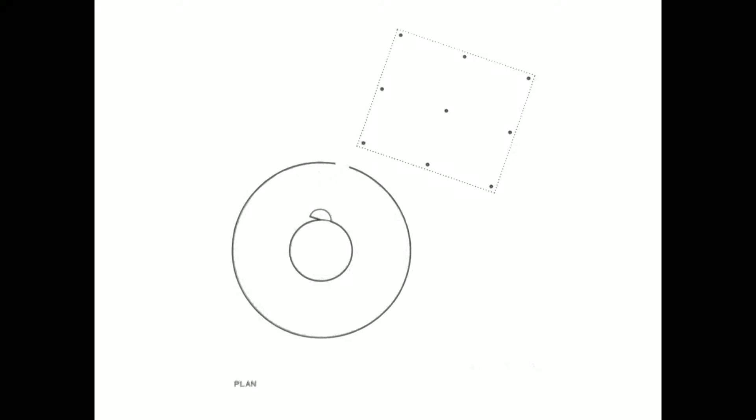It's about building simply: fixing branches in the sand, bending them to create an arch, surrounding them with straw panels with a porosity that allows air to go through, covering it with another kind of straw that will avoid water coming in during the rain season. So it's a straw hut with a little door to go in, a fence around, and in front, outside, branches fixed in the sand, covered by a roof, itself covered by straw. It was the first house that we designed at the limit of the Sahara in Niger before we started our office in Bordeaux.

It's about building with climate, not fighting against it. Taking references from professional greenhouses, this very simple ventilation system with large openings, letting the warm air go out from above and enter from the ground, using transparency to create climatic conditions for different kinds of flowers or vegetables, and transferring and adapting that to habitation, to housing, to inhabiting, to create this extra space and this free space.

It becomes greenhouses in front of houses. It becomes winter gardens. It becomes these relations between inside and outside that are so important, making every inhabitant feel like they live in a villa, turning around the different rooms.

It means enveloping the flat with a kind of double skin, a skin that is never the same, not the same in winter or summer, not the same at night or in the day, like clothes on your shoulders. If it is winter, you add one or two layers more, or a big coat, and when it is warmer, you take them off.

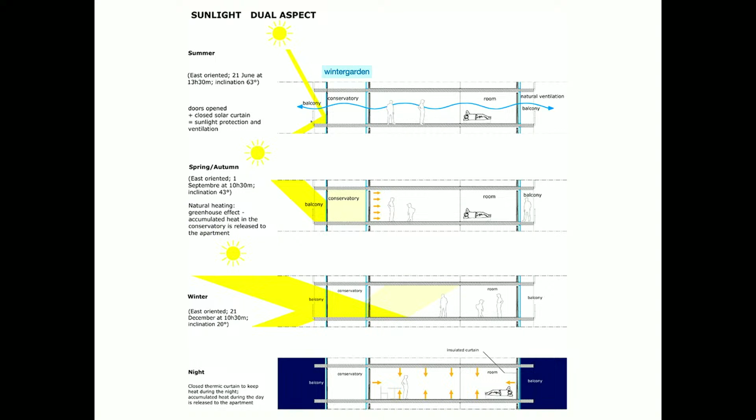So the flat and the house should work a bit like that, using the ventilation system from one facade to another, using this passive bioclimatic system of warming the buffer zone of the winter garden in order to give this warmth to the rest of the apartment and save some energy, using the rays of the sun according to their orientation, which is different in winter or summer.

Build double. It was, after coming back to Africa, the first house for Mr. and Madame Latapi. The budget was really minimum, just enough to have 60 square meters for 60,000 euros in France. Discussing with them, we went to the project to create 3 times more space for the same budget: 180 square meters for the budget that allows to build a standard house of 60 square meters.

The greenhouse on the east is 60 square meters large. It is not heated because it is heated directly by the sun, oriented east to take the first rays. We imagined this space could be for tropical plants, but immediately it was used differently by the inhabitants, placing all their furniture, their sofa, tables. We thought it might be used perhaps 50% of the time because of climatic conditions, since it was not heated, but it is the space that is most inhabited. So the space that does not answer to the regulations, the norms, the temperature limits, is finally the most inhabited space.

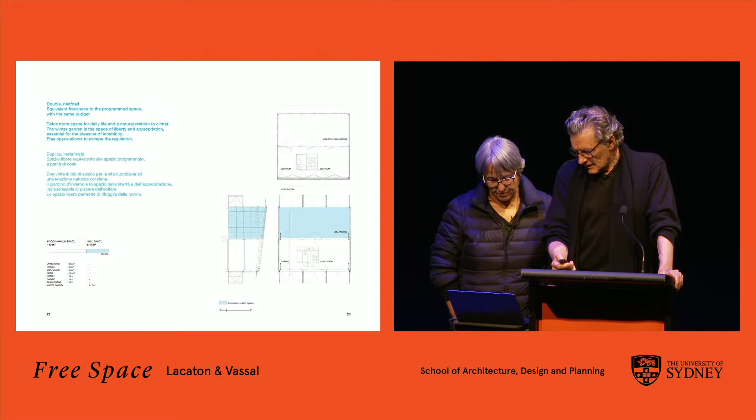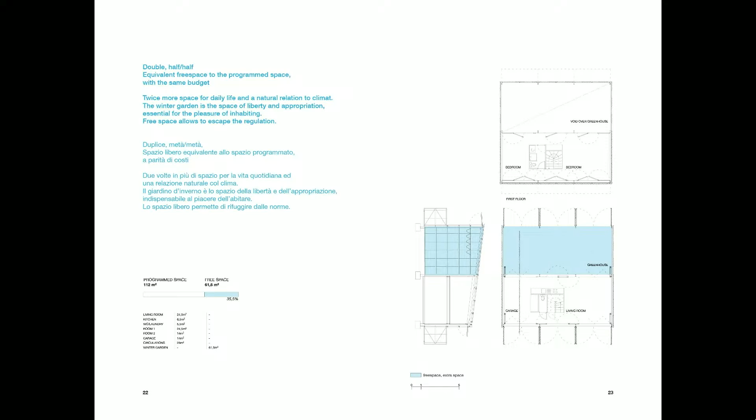In the drawings, you will see we use the color blue to show this extra space, this free space. In the case of Latapi House, it was this big greenhouse, 60 square meters, that doubled the space, which is so important in the life of the inhabitants.

So generosity of space is for us an essential condition for living well. In every project, it's a preliminary condition; we don't imagine doing it in a different way. What we can do in a house, as we showed before, we aim to do in any condition, especially in collective social housing. But it's also different situations.

Housing, collective housing, social housing are really determined by a lot of constraints, a lot of norms. Something like 4,000 norms are applied to one apartment when you have to build it. It's also very standard surfaces, connected with the subsidies, either given by the government, by the city, or if it's private development, by the developer. So all this is constrained within very, very strict limits.

But in this case, in Mulhouse, we were asked by a social housing company to work on social collective housing. The director of this company was very open, because he thought the housing was too constrained, and he wanted to experiment with whether it's possible to do something else, and under what conditions. So we were 5 architects working on this project, each with his own background, asked to explore this situation with the only condition that we should respect the budget, because it was corresponding to the public subsidies.

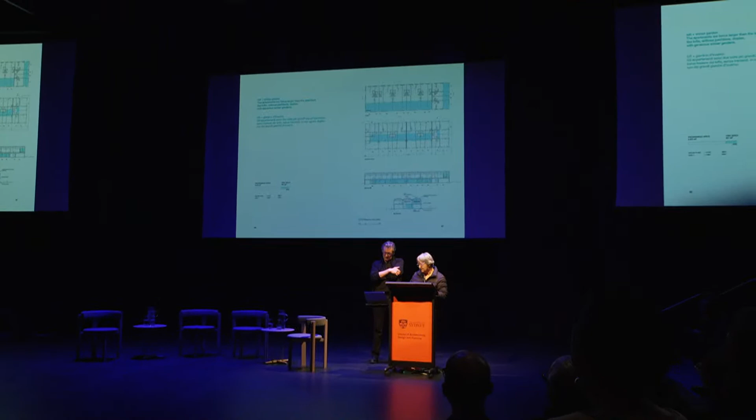So we started this project with the same idea of largely increasing the space, because for us, 2 bedrooms of 60 square meters, basically a kind of standard, 65 square meters, seems too small to have a nice life, to be quiet in the family, to have freedom of being together but also having the possibility to be separated.

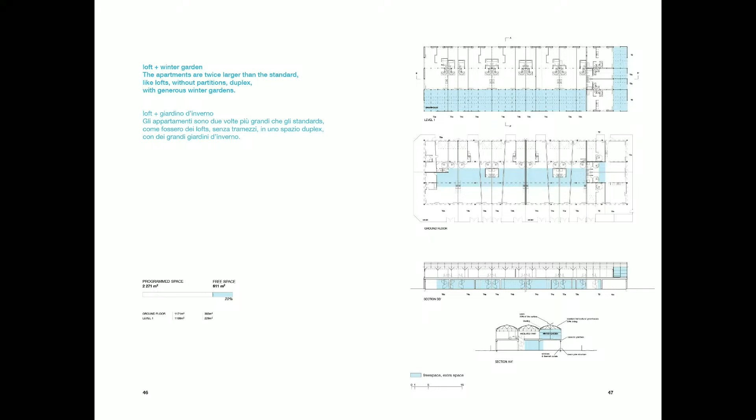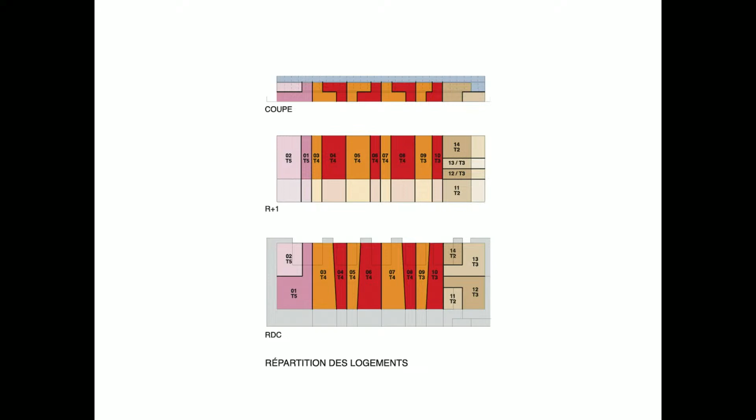So here we wanted to apply the same idea as in the Latapi house, doubling the space, making as much extra space as program space. That was a discussion with the owner, and he agreed we could do that. This is the plan of the project. It starts with the idea of a big loft with winter gardens, which we then divided into 14 apartments, each with a space on the ground floor and a space on the first floor, to benefit from the same conditions, the same qualities. So the 5 architects had the same kind of plot, and this is our proposal.

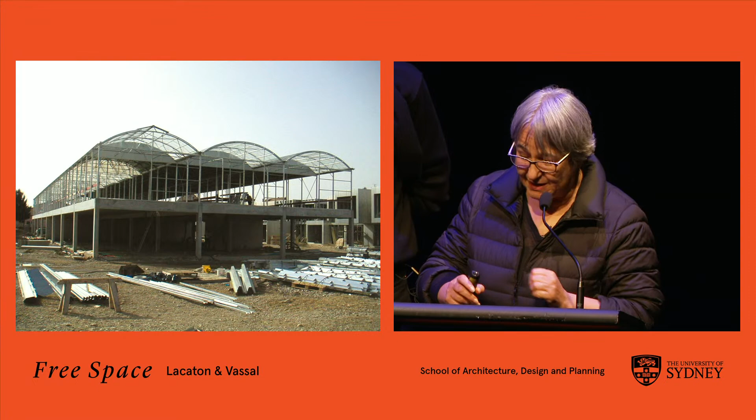To double the space within the same budget requires thinking very carefully about the relation between cost and construction, and it's important to anticipate this from the very beginning. The Latapie house was for us an amazing lesson, because we had to explore all these conditions to build double, but at the same budget. So for this project, we used a basic concrete platform, just columns and a large slab.

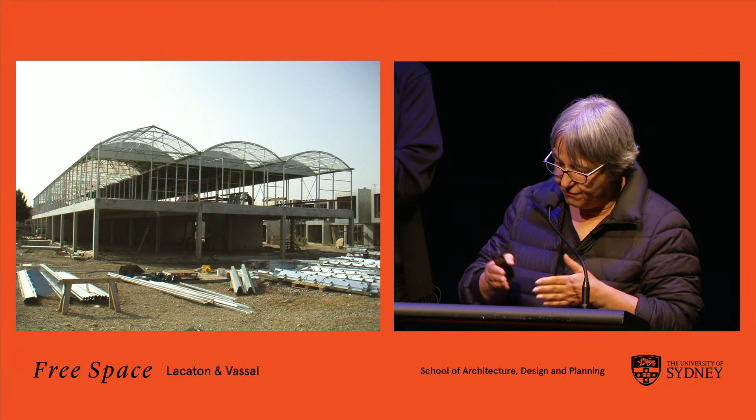And on top, we built 3 rows of greenhouses, with all the tools to create and manage the climate inside, winter and summer, by ventilation, by curtains for shading, but also by introducing a second box inside for the winter time. So this produces this project of 14 dwellings.

What's interesting is the question immediately arrived: if you build larger, the rent would be bigger, because the rent is, in practice, fixed according to the surface. But it's a discussion we had very fast with the owner, and we said we cannot expect to change anything if this kind of rule isn't discussed. Finally, he agreed to check this point, and we concluded that in France, it's not a law, just a practice that has become a law. So it was easy for him to define other conditions, and we agreed that if we succeeded in building twice as big for the same cost, he would engage to keep the rent of the typology and not increase it because the apartment was much bigger.

So here, for an apartment of 165 square meters including the winter garden, while the standard requested was 100 square meters, the construction cost was 90,000, but in 2005. The rent was the same as a 4 bedroom of 100 square meters.

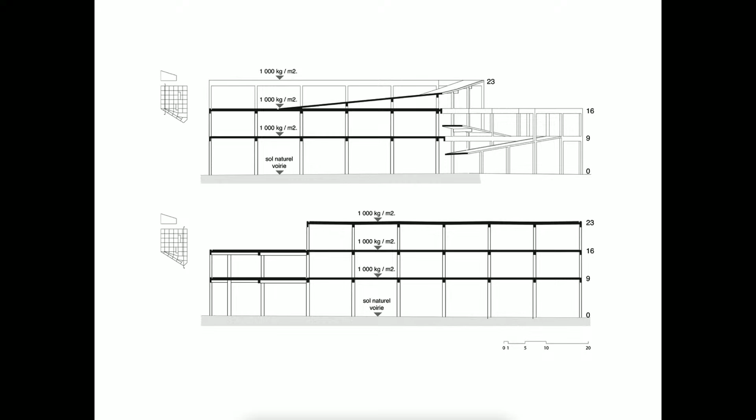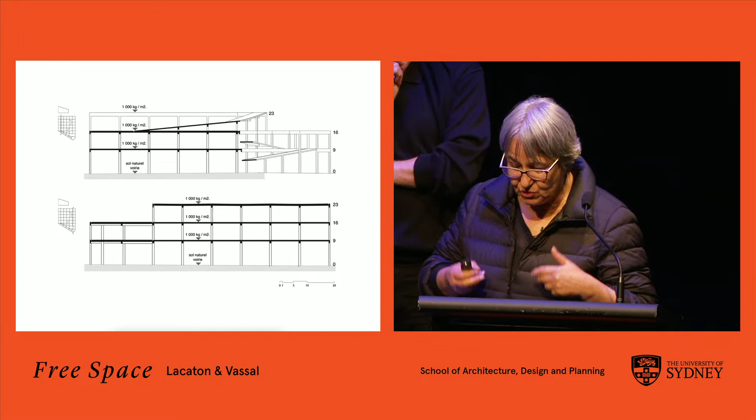So the design of the school is based on a very large infrastructure of robust concrete floors that we call 'ground,' because they have a capacity much bigger than a normal floor. There are 3 floors: the first at 9 to 10 meters high, and the other two at 7 and 7 meters high. Every floor could support a load of 1,000 kilos per square meter, which allowed a lot of things, including rebuilding mezzanines without ever having to reinforce the structure. The roof itself is similar, becoming a kind of plaza on top of the school.

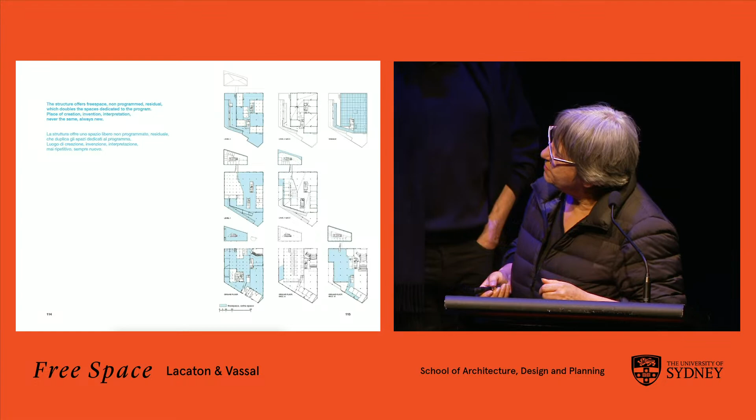Starting from this structure, which can become a school of architecture as the first program, it could also be reused in 20, 30 years for something else. It's interesting to think of structures this way — open structures, lots of light surrounding the large facade to bring light inside. Again, this big structure allowed us to rather double the surface needed for the program, meaning every program space could have an equivalent extra space.

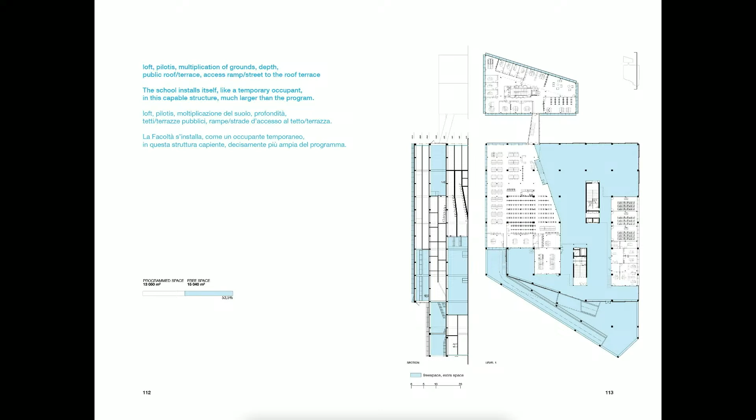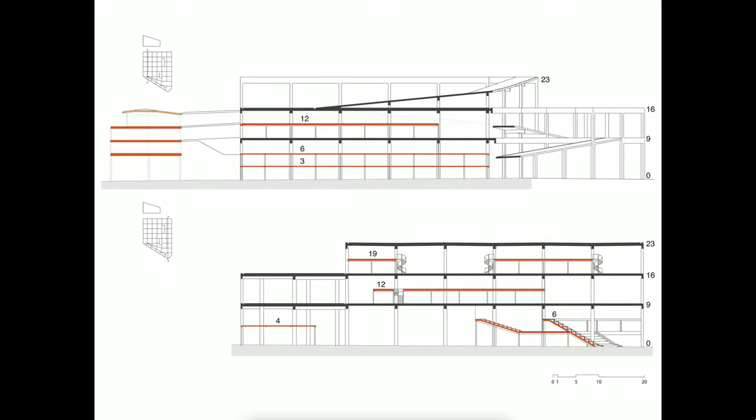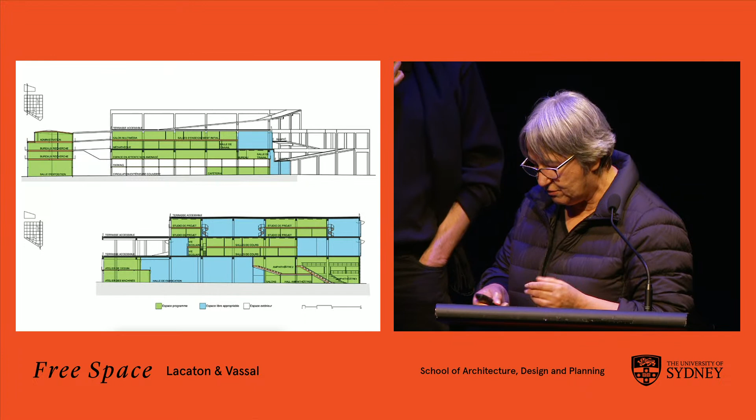Here you see the different levels — in blue is the extra space, and in white is the brief and program space: libraries, classrooms, auditorium, atelier, and so on. To create this program, we redivided the spaces with light construction, mezzanines, shown here in red. The brief program is installed in these redivided spaces, while others stay with double height. In the sections, you can see the difference: green is program space, and blue is extra space, which also has different climatic conditions, like a winter garden, between inside and outside — another way to consider energy saving.

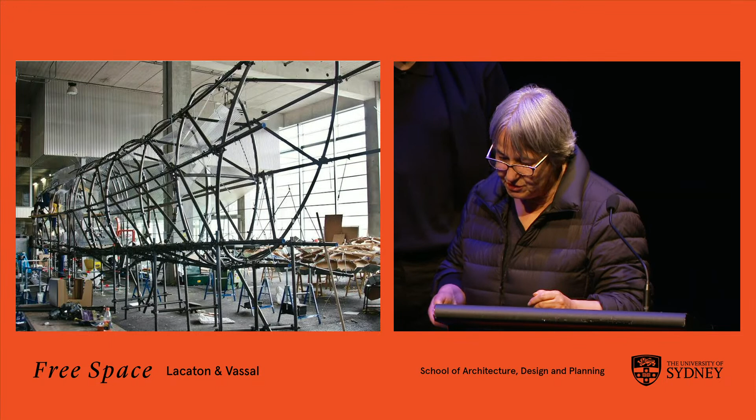So some pictures of the School of Architecture, built now 10 years ago, with a lot of facilities, like here, a large atelier of 1,000 square meters, 9 meters high, connected to the street with large windows so they can enter materials and easily do a lot of things. They can build inside, prepare large structures, but it's also a space for shows, parties, catwalks for fashion week. So it's a kind of unlimited possibility of use.

The big auditorium of almost 300 seats, which is not only for courses but also equipped to receive shows and events, with a large door that opens to the river and the square in front. So they can also rent or lend the space for theater.

The school has a department of scenography, so they also welcome residents, scenographers, and artists who find here the possibility of developing scenographies. There are also dancers, and in the first year, students are welcomed with one or two months of dancing to explore the school before they start any of the teaching.

And this extra space, which is basically free of function, is left to the users to decide what they will do with it. Here it's connected with the library, but it can basically be a meeting place, or it can be full of other activities, a balcony on the city.

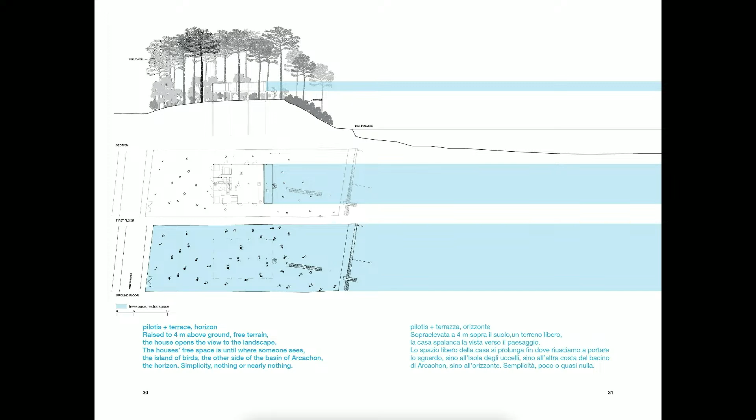And it tried not to avoid the trees, because the plan is rather regular, but to try to deal with all the trees. And here we can say that the extra space is not the house, it's a view, is what we have in front, which is the horizon, which is the sea, that totally enters the house, and the ground floor also, which is totally free. So the house is elevated.

Trees are inside, wherever they are, in the corridor, in between the bathroom and the bedroom, but also in the living room, which creates this view of nature and architecture totally merged, without any domination of architecture over the nature. And what is also interesting in this case is that the value of the plot is so high here that compared to it, the cost of architecture is rather nothing.

So built with the existing, and it's also a very important topic on which we work since many, many years. It's about doing with the housing blocks, and especially the social housing blocks, which have been built in large quantity in all cities or all suburbs during the 60s and 70s. So we are especially involved in working in this topic to transform, reuse, upgrade, to extend life, to reinvent, to do more with less.

And why we have been so much involved in this situation? Of course, because it's something already there, and we are interested in trying to do things with what we have. But also it's because in France, since 2004, there was a national program of urban renovation based on the demolition of 200,000 housing units that should be rebuilt one to one. And the cost of this was absolutely amazing, evaluated to 165,000 euros per dwelling to demolish and rebuild.

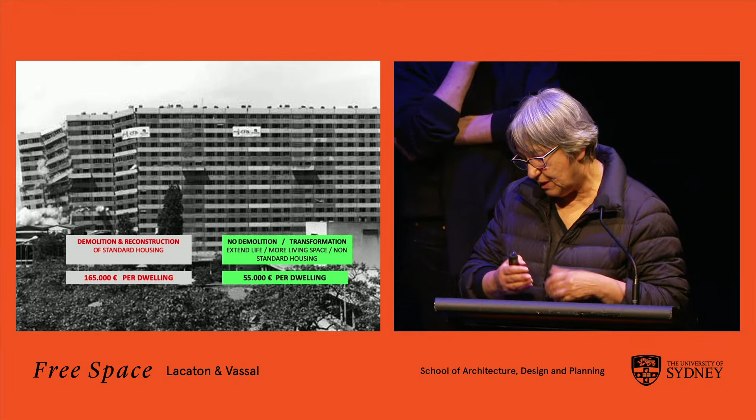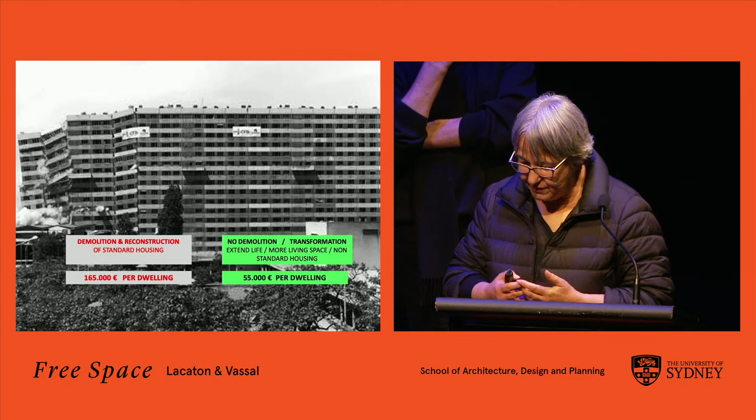And at this time, in the early 2000s, with Jean-Philippe, but also with a friend, Frédéric Druot, we were really committed to work on that situation, because we didn't really understand why buildings of 40, 50 years should already be demolished while they are rather solid, and what was the reason and the argument. And we were involved in trying to propose alternative solutions like no demolition, transformation, and we did a number of case studies to show that it was possible and to compare situations.

So all of this was published in this book that we named Plus. Plus because you can do plus with what you have, but Plus is also about generosity.

And working on different examples, as you can see here, we calculated very precisely the cost of transformation to arrive to the conclusion that important transformation, that brings these buildings into a new cycle of life in good condition, not just a minimum of renovation for another cycle of life of 40 years, for the cost of an average of 55,000 euros per dwelling—it was before COVID, today probably it's a little more, but the comparison probably remains similar—it means that for the cost of one demolition and rebuild, we could renovate or transform in the best way 3 to 4 existing apartments.

So the operation could be simple, because in the 60s and 70s, many times the construction was made very fast, because the goal was to build massively in a short time. So in some places, the quality of housing was not the main purpose, and we find a lot of situations like this, with towers or big slabs with very little windows, no connection with outside.

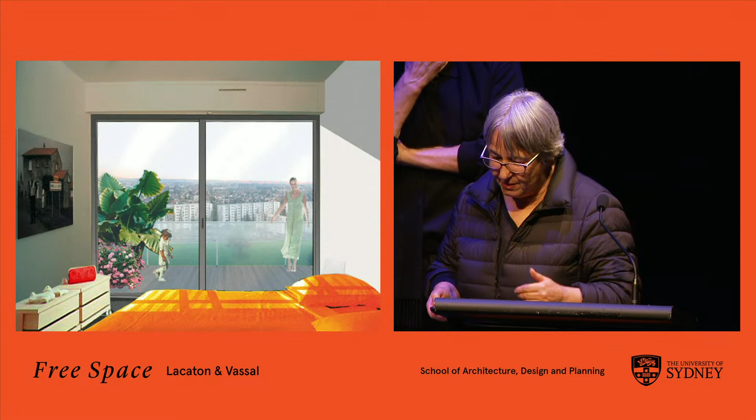And we thought that if, very simply, we could open the facade to bring light, to bring air, but also to bring an outdoor space, that would radically change the situation. And from inside, starting from little windows, instead of just isolating and reducing the windows, as probably the norm would lead to do today—the thermal norms—we think it's better to open, to create an outdoor space, and that changes the situation.

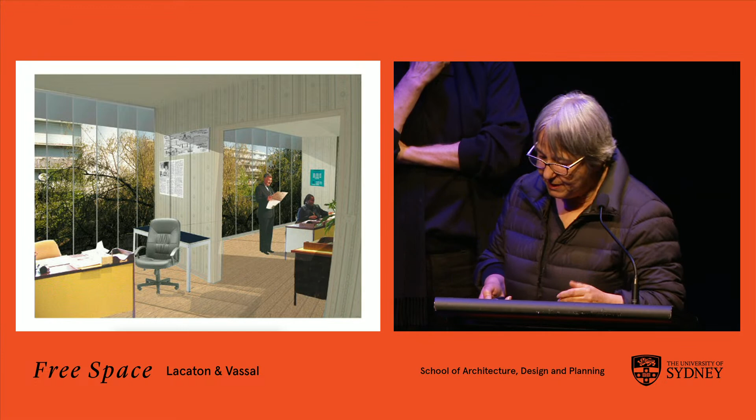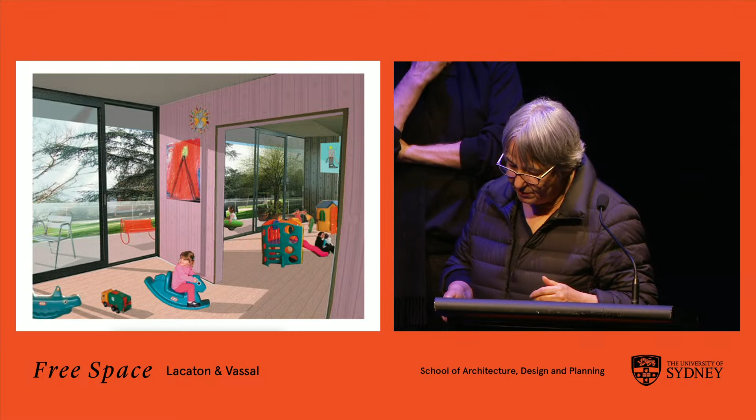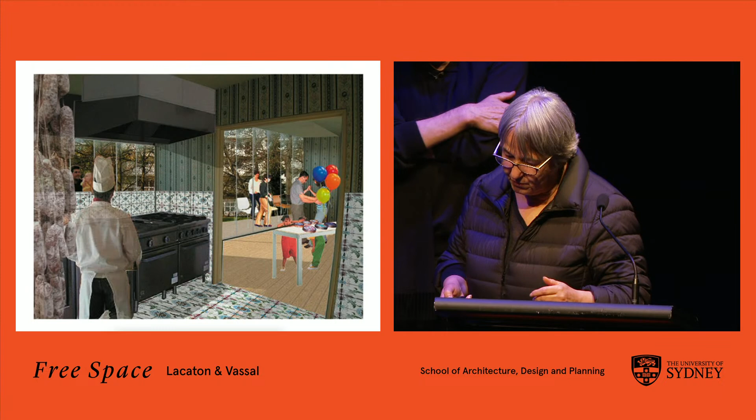But also renovate the ground floors, reintroduce the keepers, introduce some activities like working spaces on the first levels, which are not the best for housing, introduce community space, children's space, a sauna, or a lot of communal services that could be done on site, or a meeting room, or a place for cooking, and so on and so on.

So just an example to illustrate this research that we did: it's this project of 3 housing blocks in the city of Bordeaux, 530 dwellings, and we were involved in the competition for the renovation.

And again, it's social housing, a social housing firm of the city of the metropolis of Bordeaux. In the city it's really prominent because the city is very low, but it's part of a large modern development of the 60s of 4,000 dwellings. One of the blocks is this one.

It's very clear that we should never stay outside and look at these buildings like this. What is important is to go inside, because inside the reality is really different. You see all this interior space, and the value is inside. The value has been given by every inhabitant that made the decoration, that has a lot of collections of little objects. When we finished the visit, you totally forgot that it's a big slab, and you don't see anymore the image of outside.

You have just in mind that we have to do something for these dwellings to improve the quality, to bring what is missing, to repair what is obsolete or broken, because these buildings have 50 years. It becomes a kind of project, not of renovating 3 blocks, but of changing the space of 530 families and 530 dwellings. The principle is not to change the structure inside, because we propose to do this transformation in occupied site without removing any family.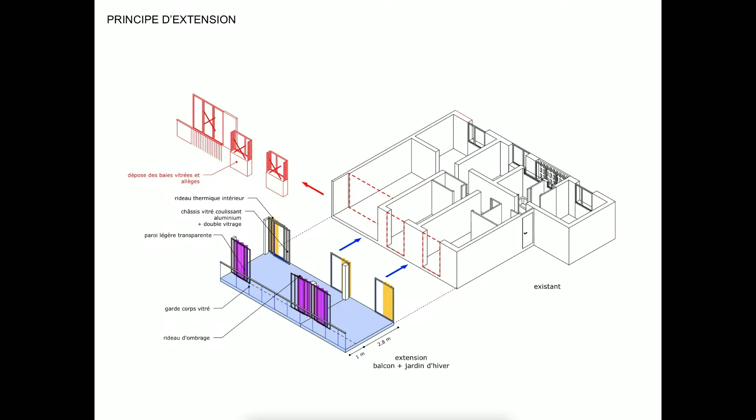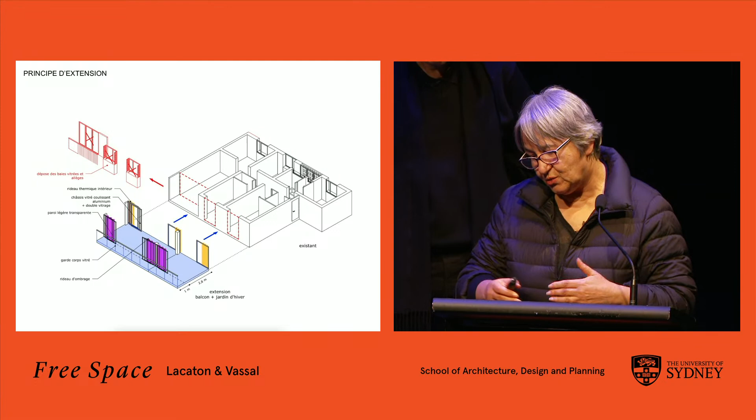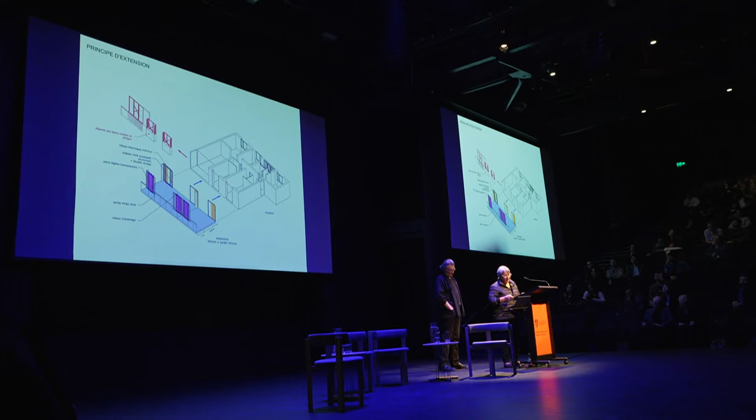So we propose to make very little works inside, just interior finishes, renovation, paintings, renovate bathroom, electricity, but no change in the walls, no restructuration inside, but to bring the space missing by adding a space in front of 4 meters, which is a kind of winter garden, and then to open all windows to transform them into a glass door, so that it's possible from every space to get light, to get transparency, but also to give the possibility to go in the winter garden like a small garden on the ground, and that changes radically the situation.

So this is a piece of the long slabs. Here again, the free space is given by this extension that is made systematically for all the dwellings at all the levels.

We did also, because it was a long process, work to inform inhabitants. It's public social housing, so it's important that all inhabitants should be informed, because also at the end they have to vote for or against the project. So we did this show flat, and this show flat became also the place of the project, with meetings, with also informations given there all along the process.

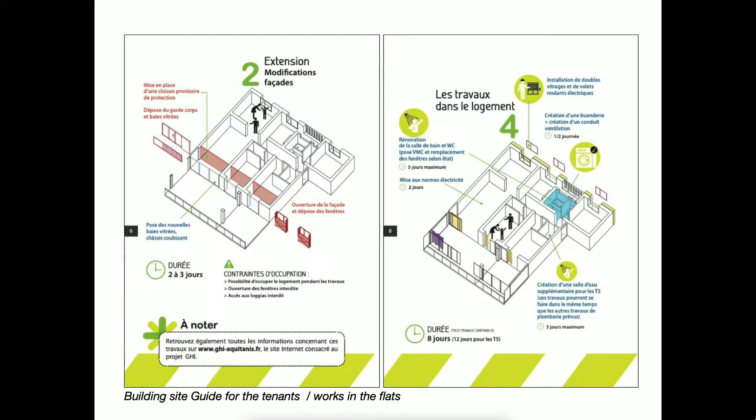And also there was this guide which was made for every inhabitant to explain the process, to explain also all the different schedules, and also give all informations of contacts that inhabitants should need during the construction, but also explain in detail. This is just one extract, but in detail all the process.

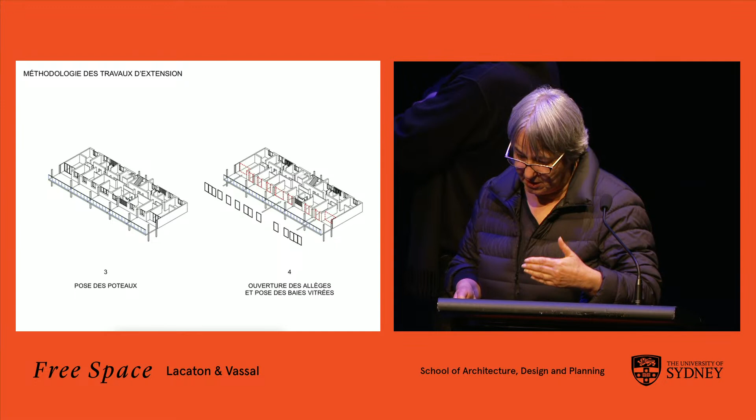And then we started the construction with these extensions by prefabricated modules, and all this changed the situation from this facade to this one. But again, it's not just a process of changing the facade, it's a process of extending the living space. So from the beginning of the design, we also proposed the methodology of works, because it should be easy and not disturbing too much for the inhabitants.

Then the process of construction started with preliminary foundations for the extension, which are supported by this foundation and not supported by the existing slabs, the existing buildings. The modules arrive on a truck, placed in front of the block, then the columns for the next modules, and again and again.

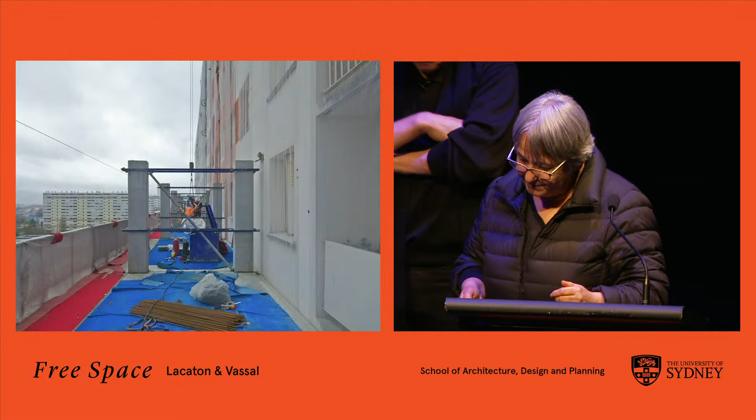And when we had a sufficient number of levels built, then we were allowed to change the facade, and this change should be done in 2 days to keep it acceptable for the inhabitants. So the first day, that was the cut of the handrails. The second day, the new glass facade, and a few weeks, not many weeks, but sometime later, the inhabitants could open and use the space.

So before, we had the situation from outside, then we placed for the 2 days of changing the facade this internal partition with the windows to keep possible the life inside. The process of cutting the handrails, and then the new windows, and the change in the relation between inside and outside, or semi-outside, which is a winter garden plus the balcony.

So all this system of winter garden, to return to building with climate, is also very important in the comfort and also in the energy saving for the building, because just the winter garden has the same efficiencies as an insulation placed on the facade, and it's based on these 4 layers: interior glass windows, external facade for the winter garden, and two curtains, one thermal curtain and one solar curtain behind the winter garden.

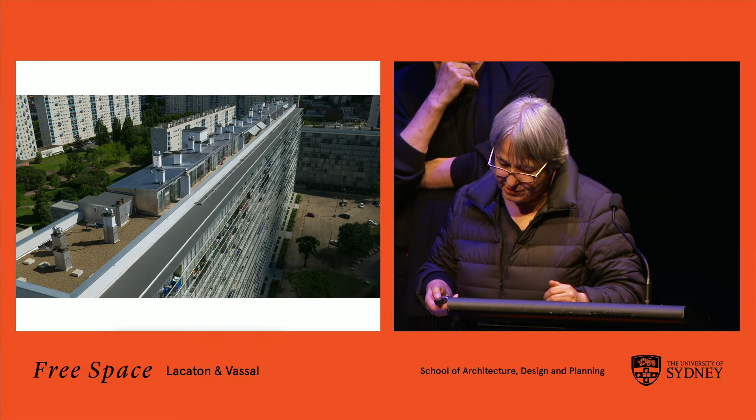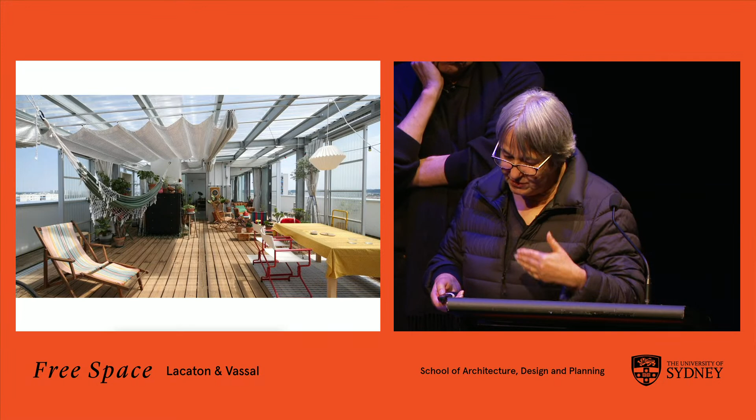We took also the opportunity of the flat roofs to introduce a new kind of houses, larger typologies, which are not existing in the building, with light constructions, not to have to reinforce structures. And here it creates absolutely amazing situations of houses with greenhouses, but also interior space.

And all of this is the same rent as it was before, because the rent has a bit increased, but the energy charges for maintenance has been reduced. So in total, for the tenant, it's the same cost per month.

So build or do not build? Yes, build or not, do not build.

This project was commissioned by the municipality of Bordeaux. It was called embellishment of some places in Bordeaux, not the main places, but some places at the periphery. This one was called the Place Léon Aucoc, and we didn't know it. We went there. The first ideas, the first feelings were that place was nice.

We asked the municipality, do you think there is a need of embellishment? Yes. And the mayor has to make an event in 6 months with the new plaza. So we work more. We come back to the plaza.

We make some interviews of the inhabitants. We look at the plaza at different moments in the day, or when it was raining, at different moments. And finally, we came back to the municipality 6 months later, and we say, this is our project. Our project is to do nothing.

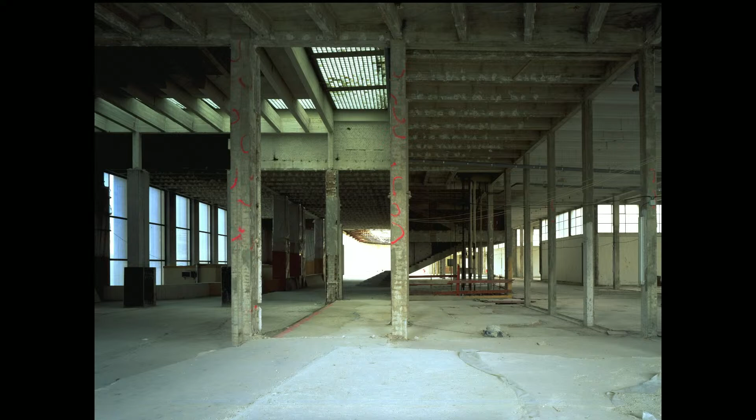And then the building stays empty during 3-4 years, 30,000 square meters of space in the middle of Paris. And we find it like that. And the first commission was to say, can you make 10,000 square meters inside? And we have 3 million euros. So it was actually nearly nothing.

And 10 years after, we had to complete with 15,000 square meters more to complete the whole building. So it's to take that situation and to say, it's a fantastic space, even if it has already been demolished in many points.

So we just have to repair, to do the minimum that is necessary for some publics, for some artists to come back and to be able to make some art pieces and for the spectators to look at them. So we take the space like that and we try to keep this atmosphere and this system, just bringing the minimum, some lights, some heating, all the security that was needed, and to leave the artist and the public going inside.

And now, since 15 years, it is a totally successful place where with nearly no money, it was possible to recreate a very important place for art in the heart of Paris.

So many events, so many exhibitions happen, totally different, like bringing 20,000 of old tires into the building and making a kind of enormous relief inside.

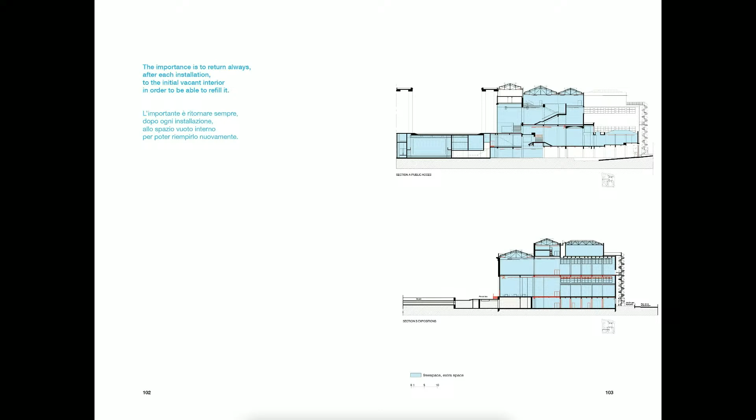Here, the free space is nearly all the space, because what we really intend is how it is possible for the spectators to be able to go everywhere in the space. Do not build, and build double.

It was a problem for this project in Dunkirk, in the north of France, with this building alone in the landscape. It was a former harbor of Dunkirk, very dynamic at the moment, and after some years the activity stopped, and this building was the only one that was kept. It was called the cathedral by the workers because it was a very huge building, 25 meters large, 80 meters long, 30 meters high, and it was used to repair some big parts of the boats.

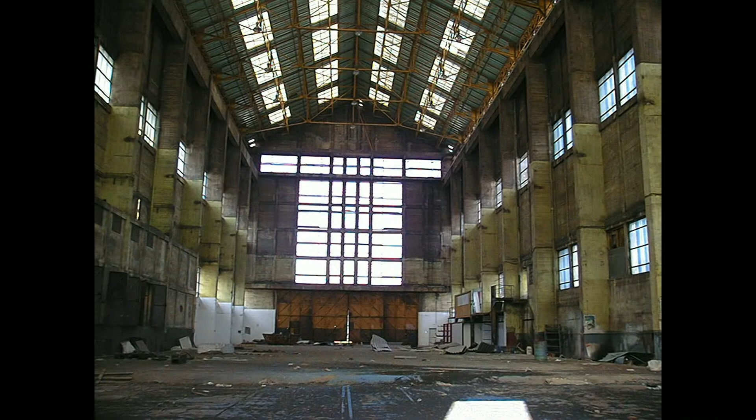It was very important for all the workers in Dunkirk, and we find this space inside. Because the activity had stopped, the project here again was to install an art center in the place. So it means to make a program and a competition in order to place inside this void 4 or 5 levels of 2,000 square meters each, to fill the void, and in this place to organize some exhibition rooms, some administration places, some storage for the artworks, some facilities for the spectators.

When we see this space, immediately we imagine that it was not possible to lose this void. So immediately we start to think about another possibility, and instead of working inside, what we propose is to create the double, a kind of twin form, a twin building, in which we would place the program that was asked for the competition of these art spaces, and to keep the void.

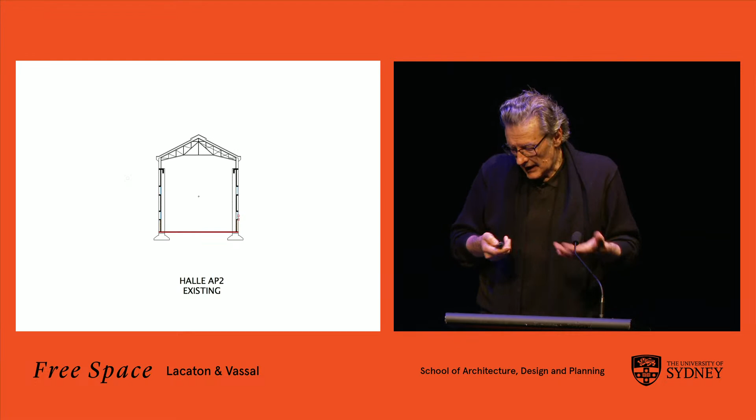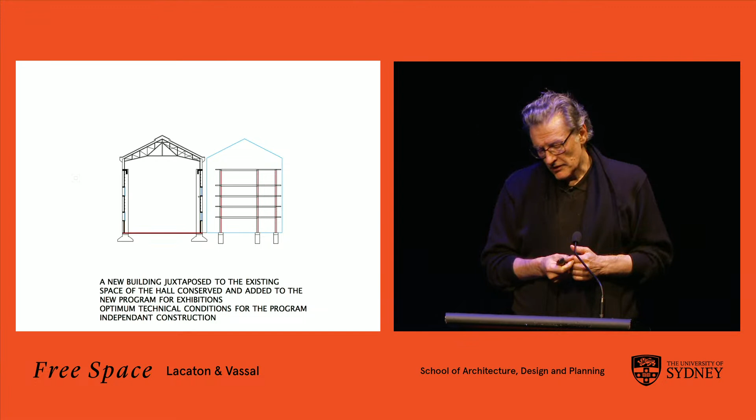So this was the existing HALLE AP2. What we do is make exactly the same building with a different envelope, with exactly the same dimension, and place the program inside in order to avoid placing it in the existing space. So here, the free space, the blue space, becomes the existing space.

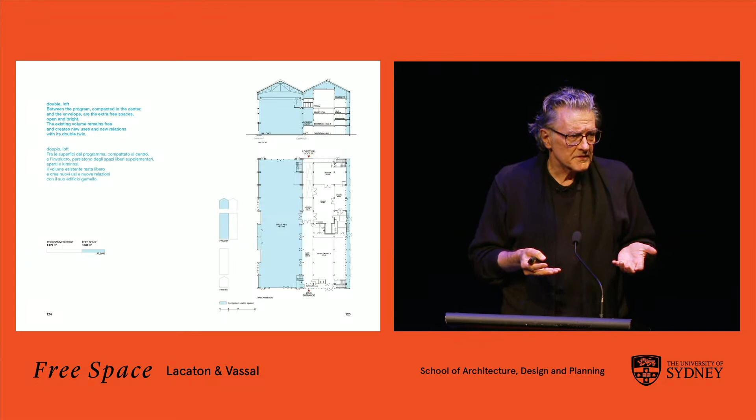And this was the result. It was much easier to build on the other side than inside, because inside the floor was very solid and thick, and it was complex to make some foundation. On the side, it was sand, much easier, and in fact it was cheaper to make it like that.

At the end, we have the capacity to use the new one and the old one, which creates strange and interesting relations between the two spaces. In the new one, we find all the program with the exhibition rooms, the space on top to see the landscape, the space between the two volumes, and precisely from the new one, the possibility to look into the old one.

It means to build double, and to keep the voids when the voids are so exciting and so interesting.

The last project that we want to show is linked with perhaps urban planning and urbanism, and it is about the questions of where and how to build. It was a commission 10 years ago that we worked on with Frédéric Druot and Christophe Hutin, for Bordeaux in the southwest of France. The question was for this community of suburbs and city of Bordeaux and around, about 1 million inhabitants: how is it possible to imagine, in the next 10 years, building 50,000 new affordable dwellings, in new spaces, in new areas, in relation with the transport system.

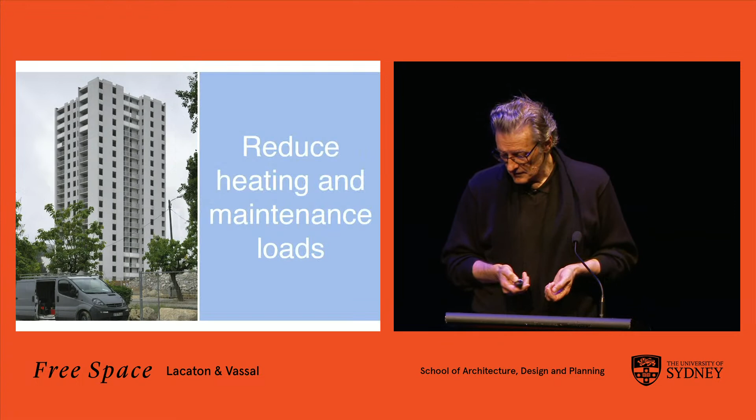Create new housing and services: instead of losing 100, you have 120. Reduce heating and maintenance loads by 60%. Never cut trees. Give air and fluidity.

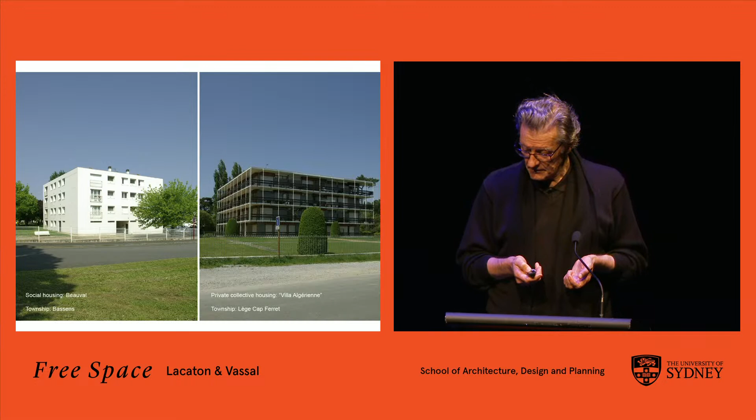Give space and luminosity, thanks to an accurate urbanism, carefully, case by case, with special care for organizations, differences, people, trees, and bugs. With the precision of urban economy, keep one's feet on the ground from each dwelling and each garden. Liberate the urban rights and use, keep in good repair. Two similar situations, without care and with care. Be careful of the special qualities and their abilities.

Make it easier for private initiative. Grant the management of public areas to private initiative. Open the view, boost the pleasure of dwelling.

Simply, from the inside of living areas, with delicacy, in an existing ground floor apartment: take off the window sill, open onto the garden. Offer the use of the garden. Contribute to the public areas between the private gardens, in existing collective, social, or private dwellings.

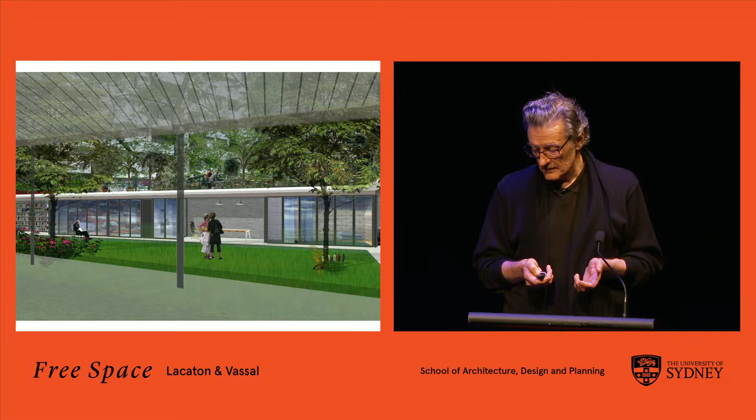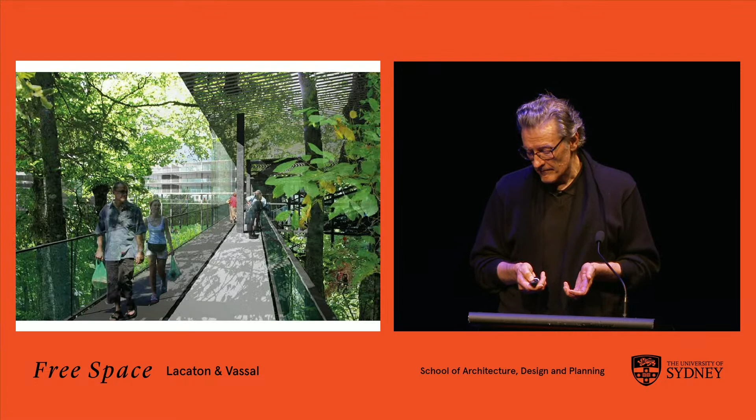Enjoy fluent and generous areas. Enjoy a large and true garden. Enjoy the outstanding view from the rooftops. Enjoy canopies without sacrificing them. Enjoy the charm of small housing, large private, intimate spaces. Enjoy oversized spaces.

Extend, add, back on, mix, optimize, superimpose, do or not to do.

Apartment blocks in Bassens: 134 existing dwellings, enlarged, insulated, plus 66 new dwellings.

Apartment blocks in Mérignac: 272 existing dwellings, enlarged, insulated, plus 123 new dwellings.

Urban context in Floirac, with a view on the small wood: 346 existing dwellings, enlarged, insulated, plus 236 new dwellings possible; 3,600 square meters of shops, plus 500 square meters of new areas; 628 parking places, plus 210 additional places.